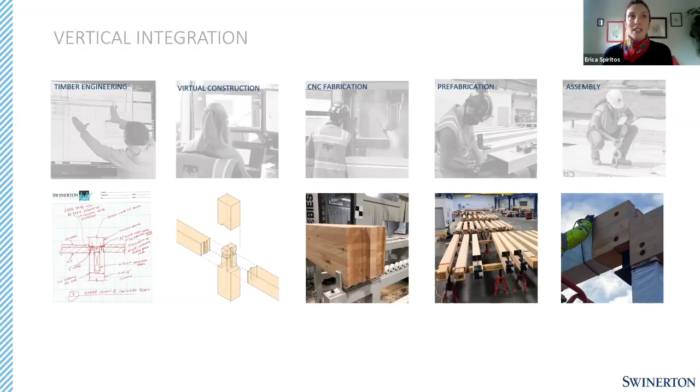Okay, so now that we've gone through the context, let's dive into 2020. This is where I work.

I show this to you all because we all have stories like this. We all have been totally upended from our normal routines. I was pregnant during the pandemic and gave birth to twins in November, came back to work, and have been learning during this time how to be a working mom. I'll remind us all that over 2 million women have left the workforce during the 2020 crises that we've been facing.

So I'm grateful to be working. I love what I do. But of course, we're all doing what we do in a very different way than we've been used to. So I want to connect with you all on that.

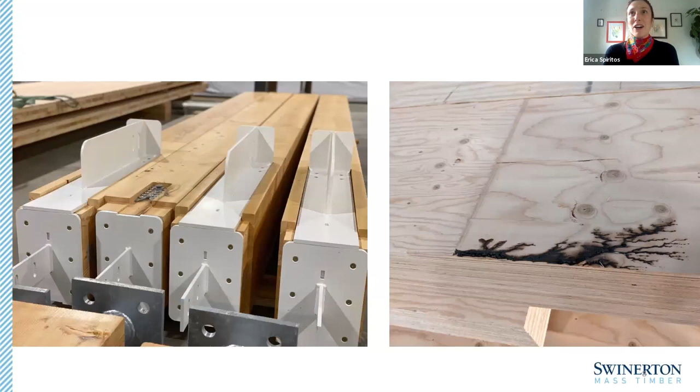Zooming out to talk about our projects, we were stalled on some of our projects. We did end up building two buildings in Central Oregon while wildfires were ravaging the western states. And in the midst of a global pandemic, lumber prices, as you know, were skyrocketing to 250% of what they typically are.

At this time of year, and across the whole year really, we saw escalation from April of 2020 through the summer. It dipped a bit, and now it's back up again to record highs. I want to take a moment to reflect on that.

The COVID pandemic was challenging for the supply chain in that it presented distribution issues with transportation of material and trucking, and issues with availability of labor to do the work. Then the wildfires presented a whole other host of issues in terms of damage to equipment, loss of precious land and trees that had been growing for, in some instances, 40 years and were ready to be harvested.

If you were a landowner preparing for a harvest in 2021, 2022, and that land was affected by the wildfire, that's 40 years worth of work and love and energy and profit that you forego in this natural disaster. So I want to remind us all of that.

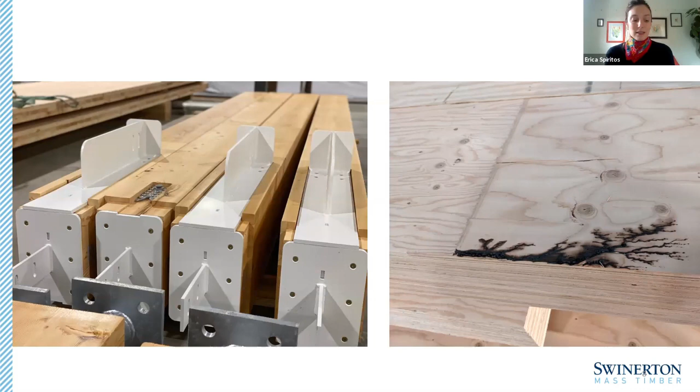Zooming out again, we can remember what it was like to try and breathe this summer on the West Coast. It was incredibly challenging to be in Western states at this time. I think all of us felt like it was a bit apocalyptic.

These wildfires that we're experiencing are a regular occurrence, and in many ways they are natural and part of the natural cycle of life. And yet we have realized that we have potentially been mismanaging or not managing lands that do need management, and that lack of forest management coupled with the impacts of climate change have led to a situation where we have enormous fuel loads in our forest lands, just waiting for a moment to catch fire and spread. We lost millions of acres of forest land in the western states this year.

It was record breaking, and this is one set of natural disasters we experienced this year. But there were 22 billion-dollar disasters in the United States in 2020 alone. That's a record number of billion-dollar natural disasters in a year, collectively causing over $95 billion worth of damage that was possible to assess. That doesn't count all of the delayed onset damage, the mental health impacts, the health impacts of all of this. It's just loss of property, effectively. So there's a lot to mourn here.

Graham Montgomery is our technical director. He's based out of Greenville, South Carolina. Graham does so much for our organization, and in a pandemic with a wife and 3 kids at home, he left his family for 2 weeks to go do fire testing for a 2-hour rated connection that he designed. So this is Graham at the Southwest Research Institute in San Antonio, Texas.

Graham had been developing this connection because we realized that what was on the market was too expensive for tall timber buildings, and with the new Type 4 construction opportunities that we were seeing and that were going to increasingly pop up around the country, we needed a cost-effective, constructible 2-hour rated beam to column connection. This is one of the projects Graham has been working on, and we now have that connection that we can employ on our projects.

Graham's done a lot of other testing this year: vibration testing, moisture testing for screws installed into wood members and how they're affected by various moisture contents. But this fire testing is really exciting for the industry in terms of the opportunities it opens up to build safe, cost-effective, tall timber buildings.

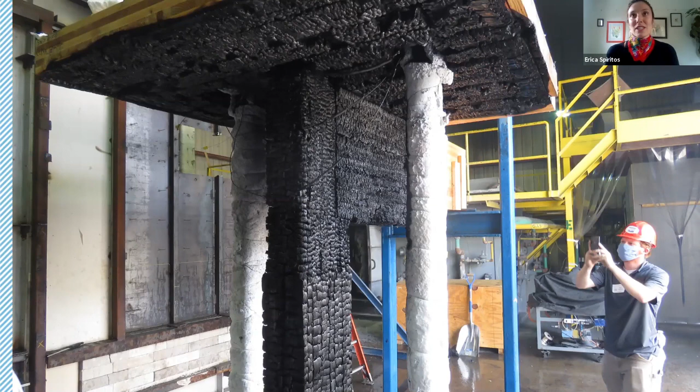We embarked on this mission a couple of years ago in an effort to expand the glulam supply chain. I think we're all excited about CLT, but remember that 40 to 50% of the wood on a mass timber building is glulam, and so that supply chain has to be robust as well.

What we noticed in the Pacific Northwest is that we have significant manufacturing capacity, but not significant fabrication capacity. I distinguish between those two in that manufacturing is the gluing of lumber together to make a commodity beam, and fabrication is the customization of that commodity into a building component. Typically that's done now with CNC machines, although it's still possible to use hand tools. But that's the fabrication process we're talking about.

This has allowed us to expand the supply chain to invite companies like Zip-O Laminators and Calvert and Roseboro into the mass timber arena. They would not have otherwise been able to participate for lack of 3D modeling capability and CNC machine capability. So we're hoping that by increasing the glulam supply options, we're able to increase competition in the market and drive down cost, ultimately accelerating the adoption of mass timber.

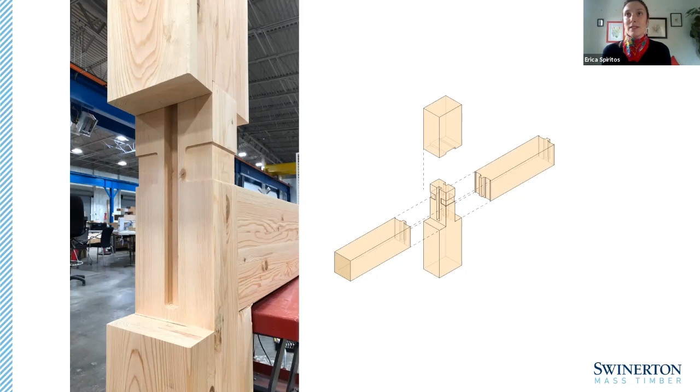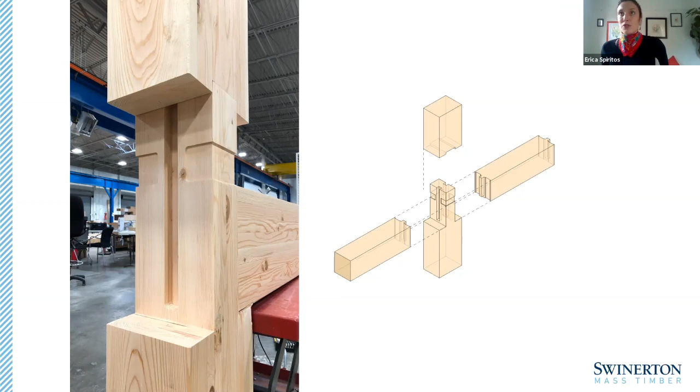One of the research projects we've been working on is to develop connections that really reduce the amount of steel in that connection, to reduce the cost and take advantage of, in this case, the bearing capacity of wood itself. So we're hearkening back to traditional joinery methods and using this mortise and tenon approach to a beam-to-column connection, which is mechanically fastened with screws, but otherwise has no steel.

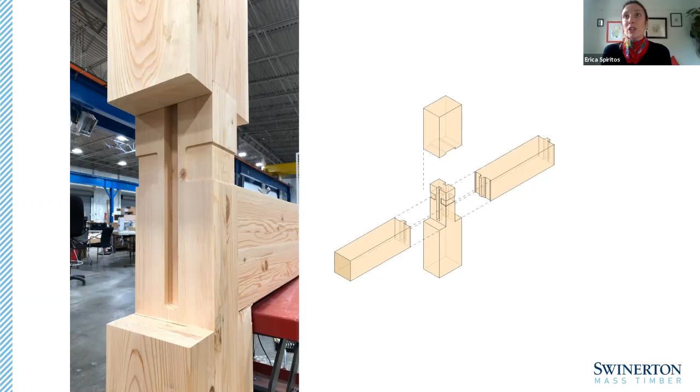And this is a 2-hour fully fire rated connection. You can see here there's some routing out of the material to accept fire tape. So we'll prefabricate this component with fire tape, and then that connection will be fully fire protected when it arrives on site.

There's another opportunity that I think we're just beginning to talk about, which is designing for deconstruction. A lot of people are wondering about end of life or end of use of mass timber buildings, and I think it's a great question to ask because nothing lasts forever. So let's be intentional about how we design our buildings in ways that would allow us to reuse the components in another application after the building is no longer serving us. We are thinking about the components that go into the building, the way they're assembled, and opportunities to then dismantle these buildings.

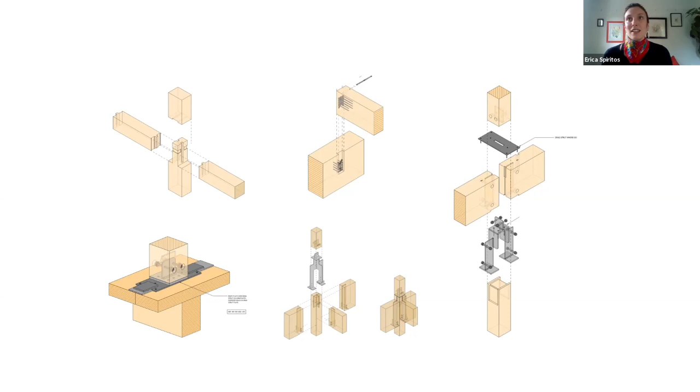So imagine that as you design your mass timber projects.

Currently in our fabrication facility and upstream into the manufacturing, we use a software called Manufacton, which allows us to trace and track our components from the manufacturing facility into the field. So every component, and actually it begins in the model, we can identify various characteristics, moisture content, sizing, sequence of installation, and then track where these materials are in their life cycle to getting to the site. And then if at any point in time we need information about that material, we can scan the QR code and get information.

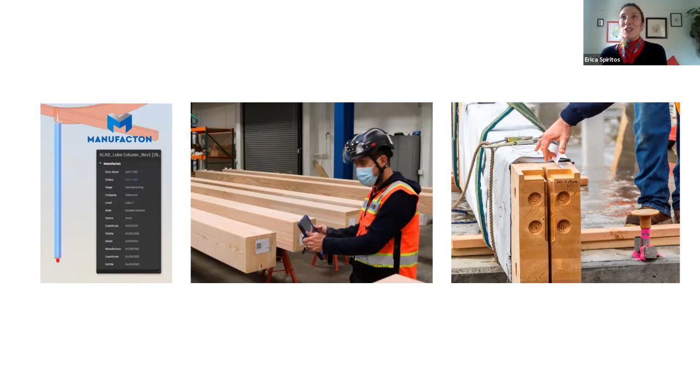But imagine with me for a moment a future where this continues, and we've got etched into the side of a building a QR code that someone in 100 or 200 or 300 years could scan and receive information about every single component in that building, and how to dismantle the building safely and effectively for maximizing reuse of those materials in a different application. We're not there yet, but we're asking those questions, and we're thinking it might be possible.

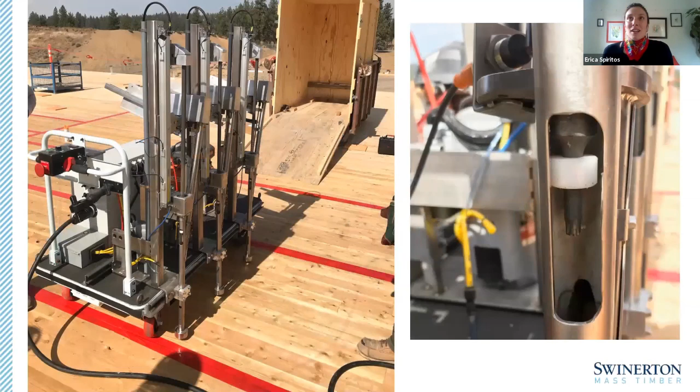Another thing we've been working on is labor productivity and improving safety outcomes on site. What you're looking at here is a robot that installs self-tapping screws, in this case bearing screws that go from the CLT deck into the glulam beam below. One of the challenges we face on our sites is back strain, so we're trying to reduce that load on our field labor. It's incredibly taxing to install hundreds of screws, and it has an aggregating impact over weeks. If we can supplement that work with a robot that doesn't have a back to strain, we might accelerate adoption of this construction type and improve safety and labor productivity on our sites.

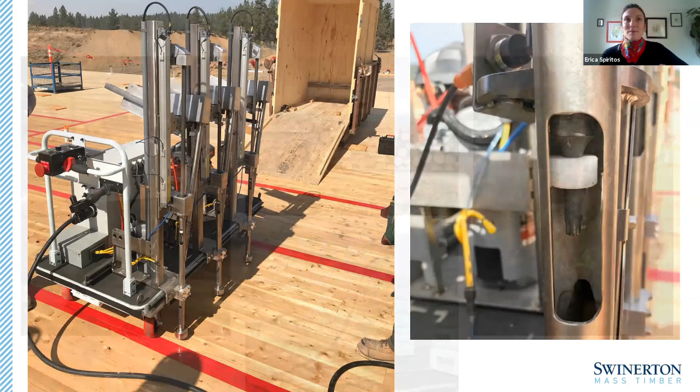And lastly, I'll talk a little bit about wood sourcing. A lot of people interested in mass timber buildings are curious about where the wood comes from, and I think that's totally understandable. Our humanity is so incredibly intertwined with this material. We used wood as our first shelter, our first tool, and our use of wood for cooking and fuel, for starting fires, allowed us to cook food and extract nutrients enough to nourish our brains to the point where I could even give this talk today. So it makes total sense to me why we care so much about understanding where the wood comes from on our projects. I think it's innate in who we are as humans.

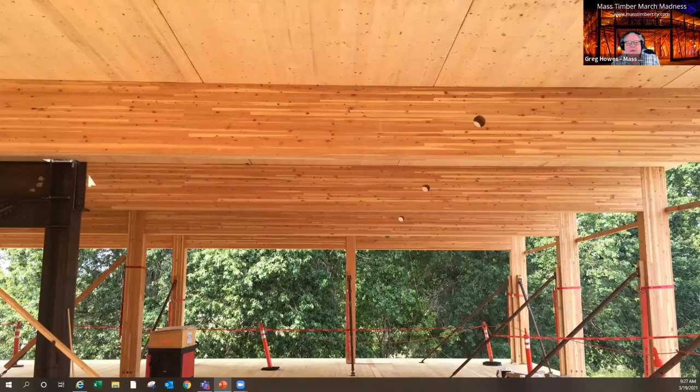Thank you, Erica, for an excellent presentation, and especially thank you for making it so personal, so authentic. You're so knowledgeable about mass timber, and so passionate about it. It's great to have you as a recognized voice.

Wonderful, thanks, seriously. Do you have time for some questions? Absolutely, but I don't know, I think all you're going to get is thank yous. No, seriously, I'll read through them.

I'm just going to read a couple of the messages. Thank you, Erica, for presenting such an impactful message. I did not expect such a meaningful presentation. Love it. Again, thanks for the mix of inspiration and technical info.

And as a fellow working mom who also had a new baby in fall 2020, thank you for acknowledging the unusual work-life balance we've all been juggling over the past year plus. Another one: thanks for sharing your personal story and tying mass timber into the larger world events. Thank you, Erica, for reminding us why this matters and being so amazingly human.

Wonderful presentation, Erica. Again, the next one, thank you for bringing in the big picture in a larger context. I think there's just a general consensus, Erica, thank you for being so authentic and so real, the kind of voice we need. Wow. And then from your father, Erica: I'm so honored to be your father. Thank you for your humanity and your love of the world, Dad. Ooh, you're going to make everyone cry.